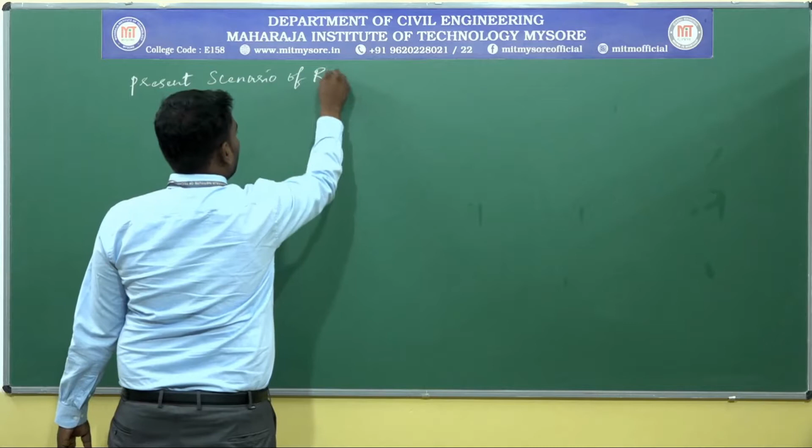In the last session I explained the present scenario of road development in India, and in today's session I am going to teach the present scenario of road development in Karnataka.

As in the present scenario of road development in India, there are two programs: NHDP, that is National Highway Development Program, and PMGSY, that is Pradhan Mantri Gram Sadak Yojana. In the present scenario of road development in Karnataka also, there are two programs.

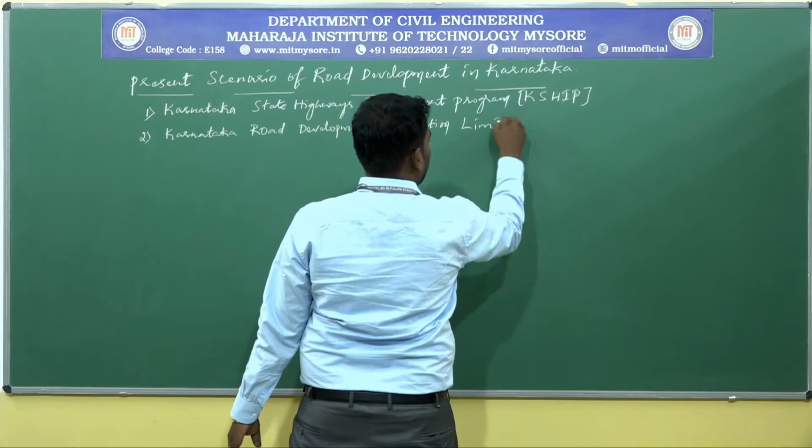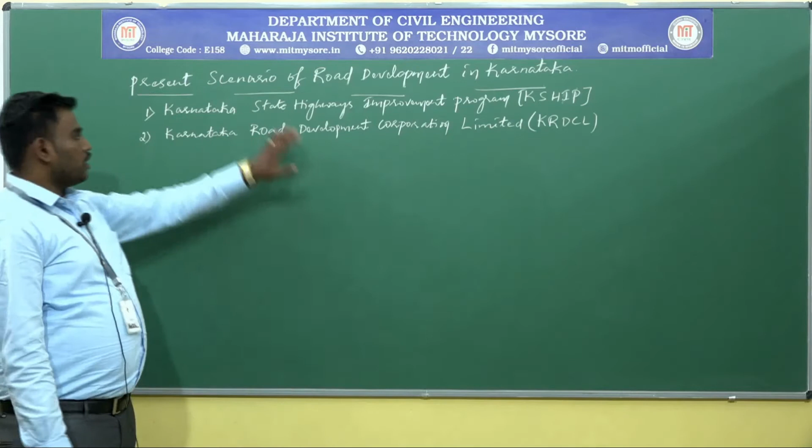The first one is K-SHIP, that is Karnataka State Highways Improvement Program. And another one is Karnataka Road Development Corporation Limited, that is called KRDCL. So there are two programs in the present scenario of road development in Karnataka: Karnataka State Highways Improvement Program, that is K-SHIP, and Karnataka Road Development Corporation Limited, that is KRDCL.

I'll move on to the first one, that is K-SHIP, Karnataka State Highways Improvement Program. K-SHIP is a road improvement program, and it will be undertaken under a World Bank loan for the improvement of about 3,411 kilometers of roads. It may include state highways and major district roads.

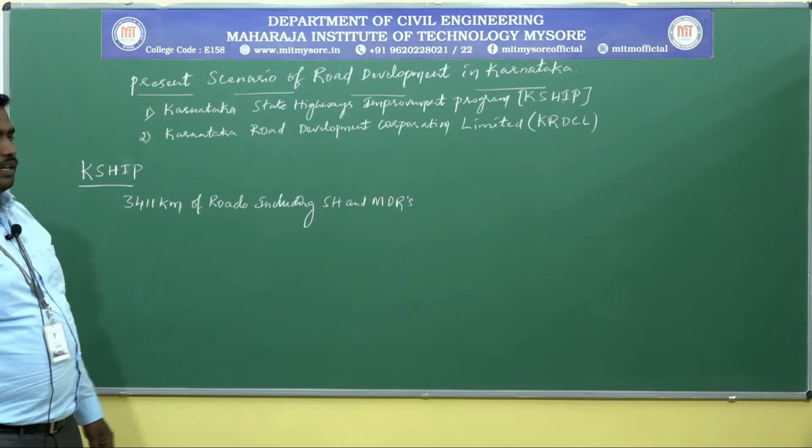About 3,411 kilometers of roads, including SH and MDR, that is state highways and major district roads, will be included and come under K-SHIP. So K-SHIP is a road improvement program undertaken under a World Bank loan to construct about 3,411 kilometers of roads, including state highways and major district roads.

Next, for K-SHIP, the total estimated expenditure is about 650.75 crores. And this K-SHIP program covering 3,411 kilometers of roads will be implemented in stages, not all together at a time. The improvement of 3,411 kilometers of roads is not done at once; they are done in stages, and the total estimated cost for this K-SHIP project is about 650.75 crores.

The contract period for the construction of this project is also fixed, at about 36 months. The contract period for the construction work is about 36 months, and the design life for this project is 20 years from the starting date of vehicle operation.

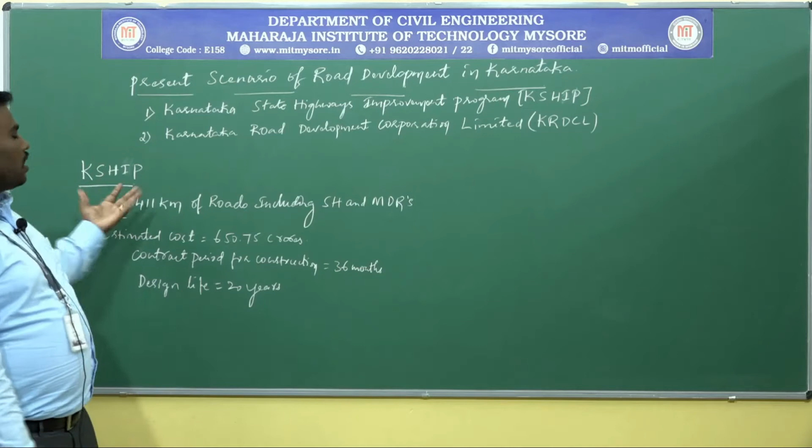This is regarding the brief of K-SHIP. K-SHIP is a road improvement program undertaken by a World Bank loan for the improvement of about 3,411 kilometers of roads, including state highways and major district roads. It was done in stages, with a total estimated expenditure of about 650.75 crores, a contract period for construction of about 36 months, and a design life of about 20 years from the starting date of vehicle operation.

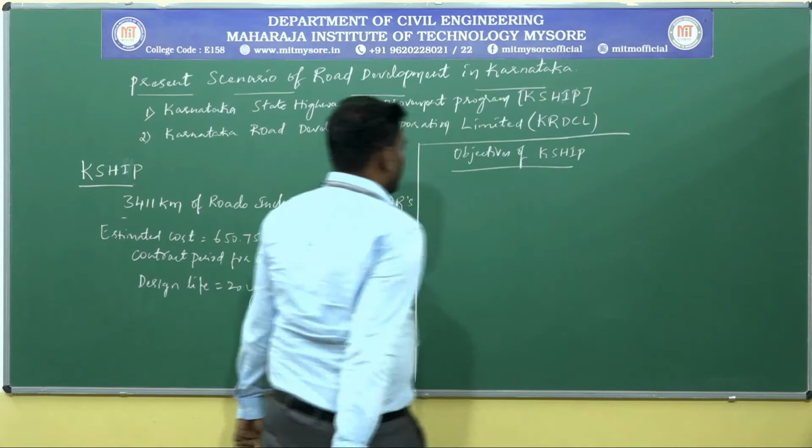Then, the objectives of this K-SHIP project. The first one is improvement of the existing road network, which includes raising of formation width, widening and strengthening of pavements, and realignment of roads wherever required.

The second objective is that the works include pavement design and design of other structures. The third objective is to enhance road safety by improving accident-prone areas and by providing bypasses in congested areas, leading to enhancement of safety.

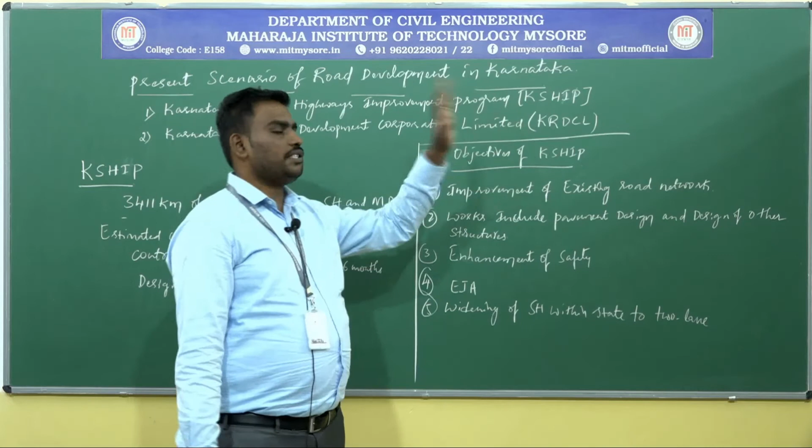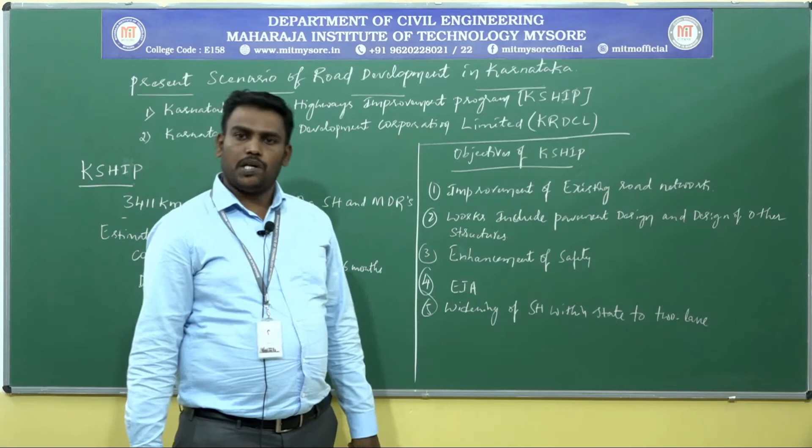Then enhancement of road safety by improving the accident prone areas and also by providing bypasses around the congested areas. Next, all the projects undertaken under this K-ship were a part of environmental impact assessment. Then progressively widen the state highways within the state to the 2-lane width. These are the objectives of Karnataka State Highways Improvement Program.

Next I'll move on to the Karnataka Road Development Corporation Limited, the second program under Karnataka, the present scenario of road development in Karnataka. I'll move on to the KRDCL.

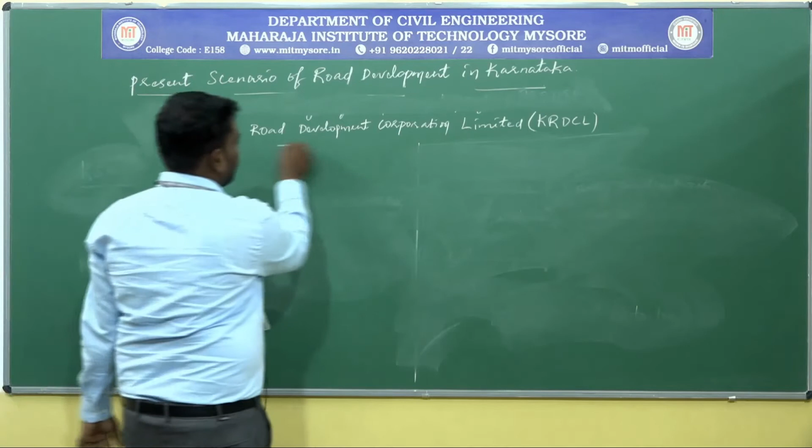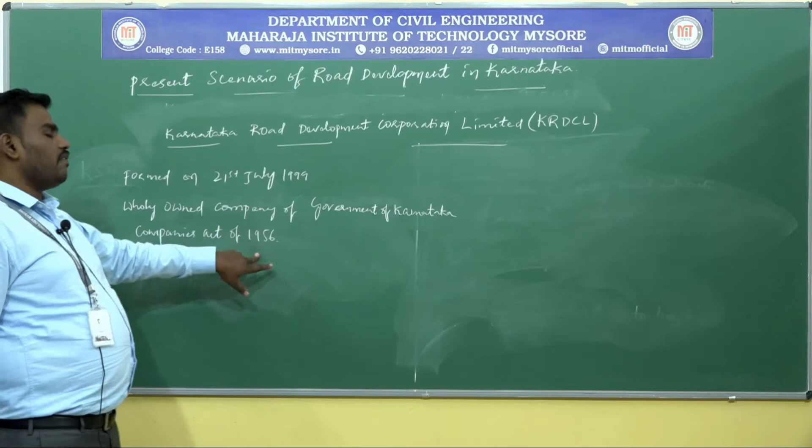This KRDCL was formed on 21st July 1999, and it is the wholly owned company of Government of Karnataka, formed under the provision of Companies Act 1956. As per the provision of Companies Act 1956, the KRDCL, that is Karnataka Road Development Corporation Limited, was formed on 21st July 1999, and it is wholly owned company of Government of Karnataka.

This company was established, the KRDCL was established, to promote the surface infrastructure by taking up roads and bridges, and improve existing road network by construction, maintenance, widening and strengthening of roads, construction of bridges, maintenance of roads, and all projects taken under BOT and BOOT, that is build-operate-transfer and build-own-operate-transfer.

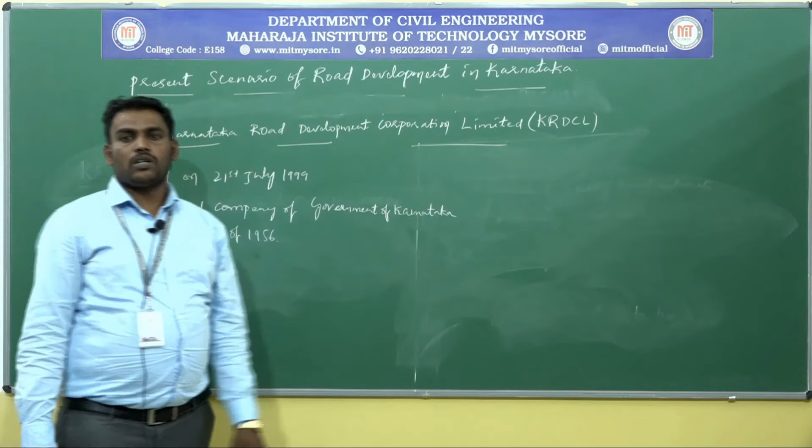This company KRDCL was established to promote surface infrastructure by taking up roadworks and bridges, and to improve existing road networks by taking up construction, widening and strengthening of existing pavements, and maintenance of roads by taking up construction of bridges. There may also be projects taken up under build-own-operate-transfer, that is BOOT, and build-operate-transfer, that is BOT concepts.

This KRDCL, Karnataka Road Development Corporation Limited, comes under public works and ports and inland water transport department. Is it clear? This KRDCL comes under public works, that is called PWD, we call it in Kannada Lokopayogi Ilake, and ports and inland water transport department, that is Bandaru and Valanadu Sarige Samsthe.

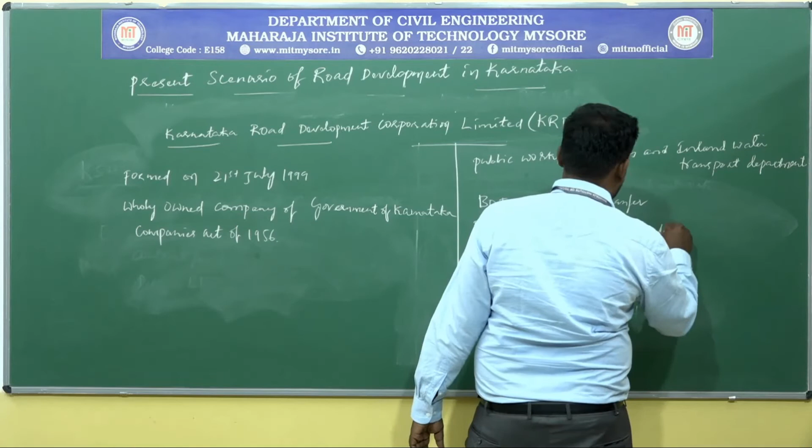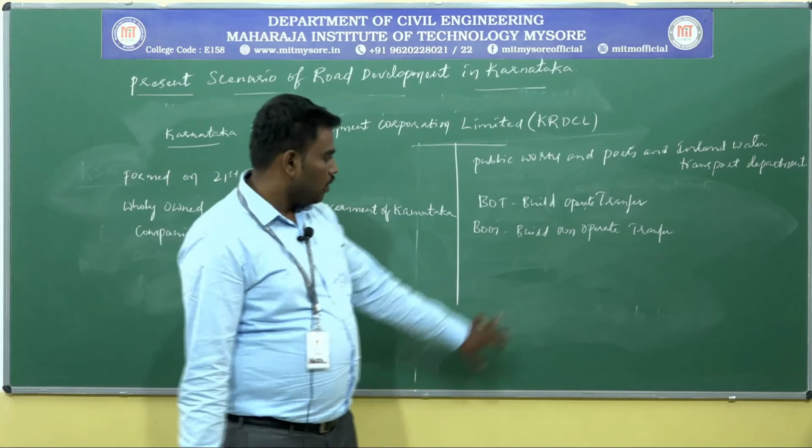Is it clear? This covers some of the key points regarding the Karnataka Road Development Corporation Limited.

This is a company under the provisions of Companies Act 1956. It was formed on 21st July 1999 and is wholly owned company of Government of Karnataka. This KRDCL comes under Public Works and Ports and Inland Water Transport Department.

This KRDCL will promote the surface infrastructure by taking up road works and bridge works, and improve the existing road networks by taking up construction, widening and strengthening of pavements, construction of bridges, maintenance of roads, and also by taking up projects under BOT and BOOT. These are the key points.

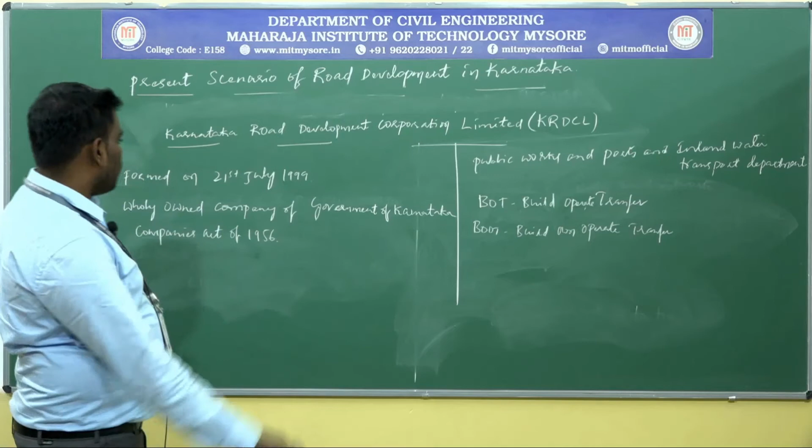Key steps in KRDCL. The first one is quality and cost based selection of consultants and contractors.

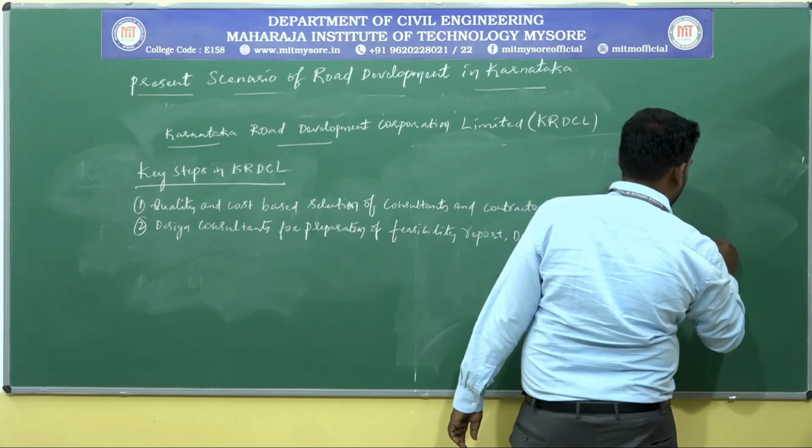The second step in KRDCL is design consultants for preparation of feasibility report, detailed engineering report and tendering documents.

The third one is construction by qualified contractors. Once construction by qualified contractors is done, the next is quality check by independent consultants.

The fifth one is, once the quality check by independent consultants is done, they release the amount - that is uniform cash flow and timely payment. The sixth one is borrowed fund backed by government repayment. And the seventh one is maintenance after construction.

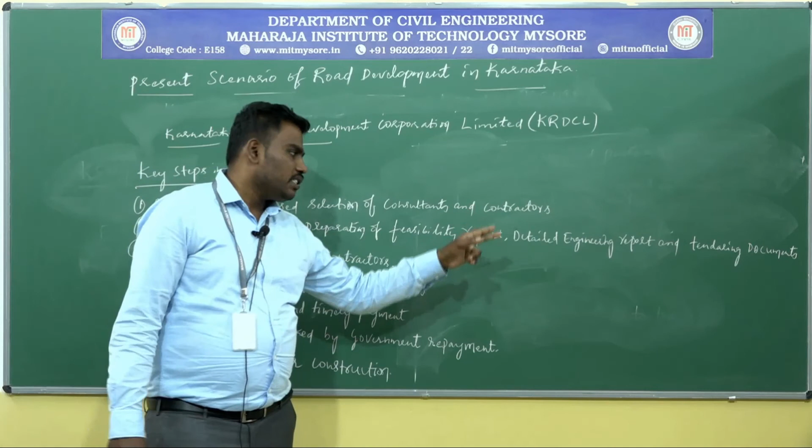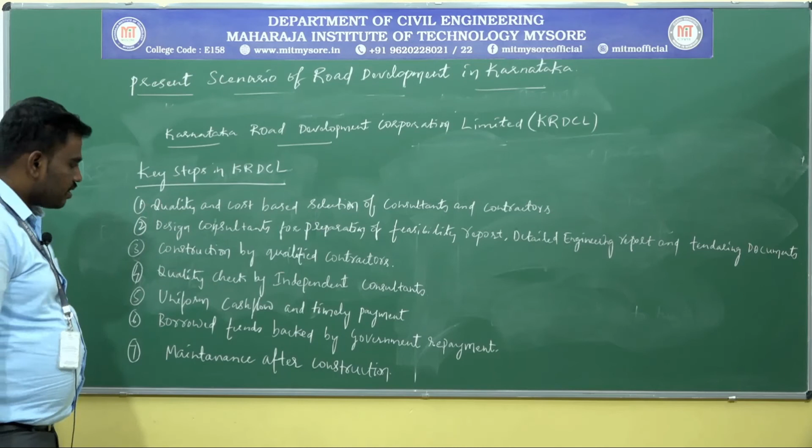These are the key steps in KRDCL projects: first, quality and cost based selection of consultants and contractors; then design consultants for preparation of feasibility report, detailed engineering report and tendering documents; next, construction by qualified contractors; next, quality check by independent consultants; next, uniform cash flow and timely payment; borrowed fund backed by government repayment; then maintenance after construction. These are the key steps in KRDCL, Karnataka Road Development Corporation Limited.

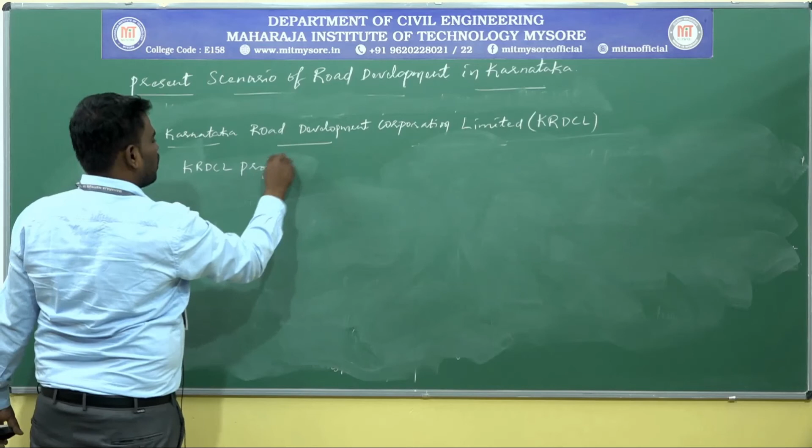Next, I'll move on to some of the KRDCL projects. If you go for KRDCL projects, number one is about roads.

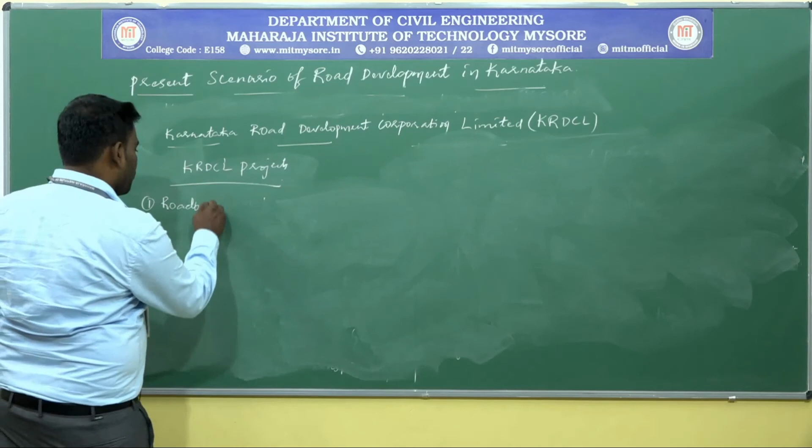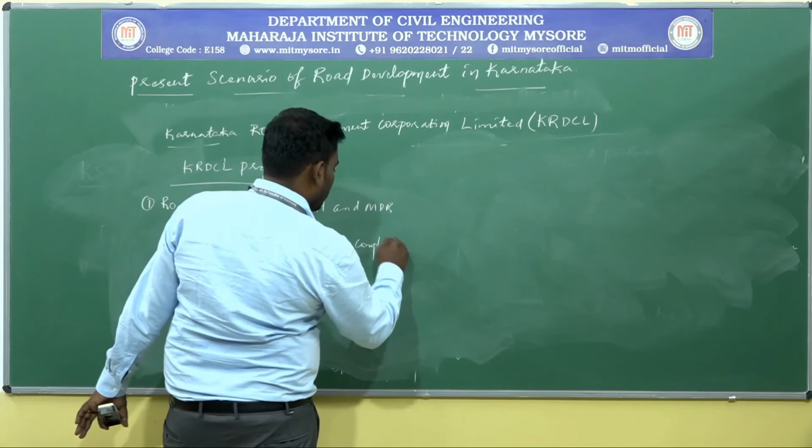The KRDCL has taken up widening and upgradation of about 1055 kilometer of state highways and major district roads, out of which about 601 kilometer is already completed.

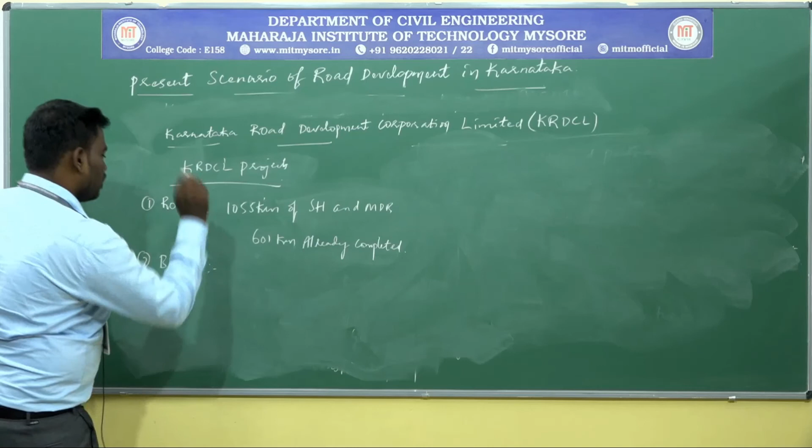Next, we'll move on to the bridges. The KRDCL has taken up construction or reconstruction of bridges along all the major state highways and major district roads within the state, in 4 phases.

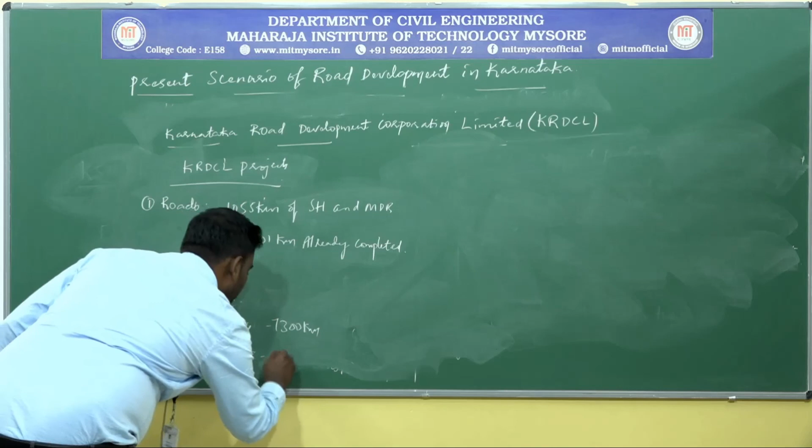Next, maintenance of roads. From 2001 to 2004, that is phase 1, the KRDCL maintained about 7,300 kilometer of state highway. In phase 2, from 2005 to 2008, the KRDCL maintained about 14,500 kilometer of state highways. These two maintenance projects are already completed.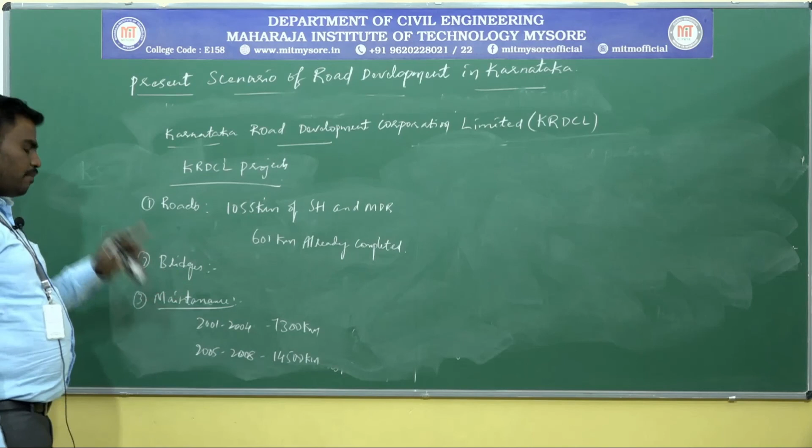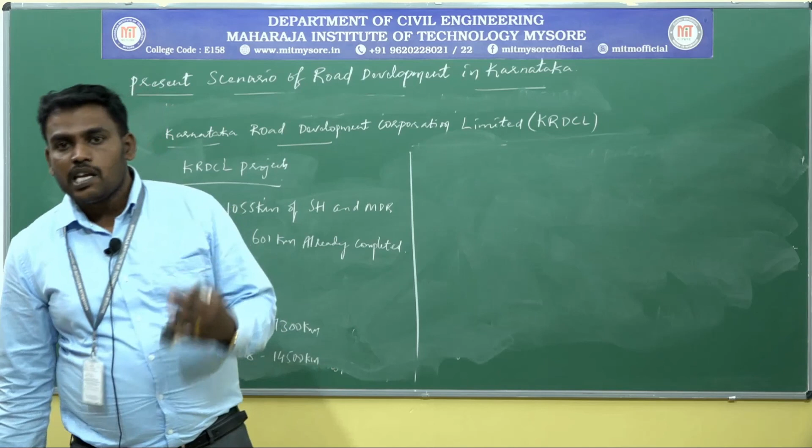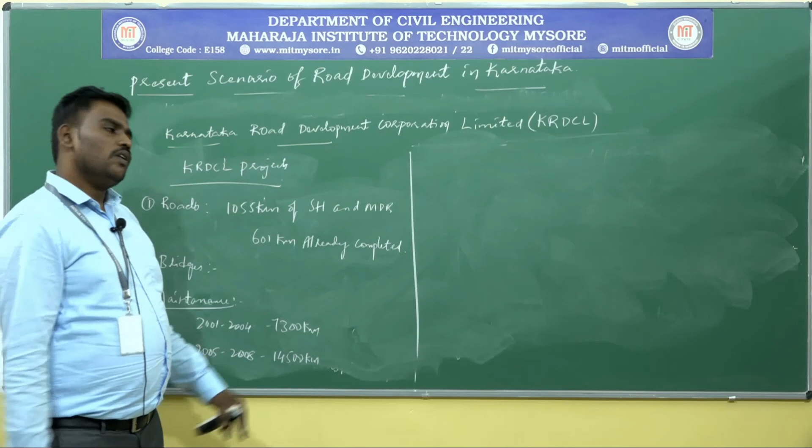In addition to these roads, bridges and maintenance, the KRDCL is also administering some of the public works department execution projects, particularly improvements of roads executed by the Public Works Department, that is PWD.